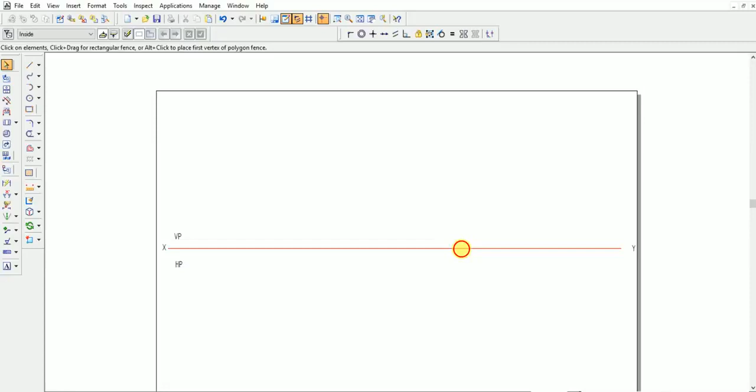Hello everyone, in this video I would be showing you how to draw a pentagonal lamina which has got sides of length 25 mm and rests on its corner on HP such that the surface makes an angle of 30 degrees with HP and the perpendicular bisector of the edge passing through the corner on which the lamina rests appears to be inclined at 30 degrees to VP. Then draw the top view and front view of the lamina.

Yes, let us start by drawing the pentagonal lamina. If you are unaware of the way to define the lines, say visible line or XY line or anything as such, you can visit the first video of this particular playlist which has got the information regarding the ways to define the lines. Let us begin.

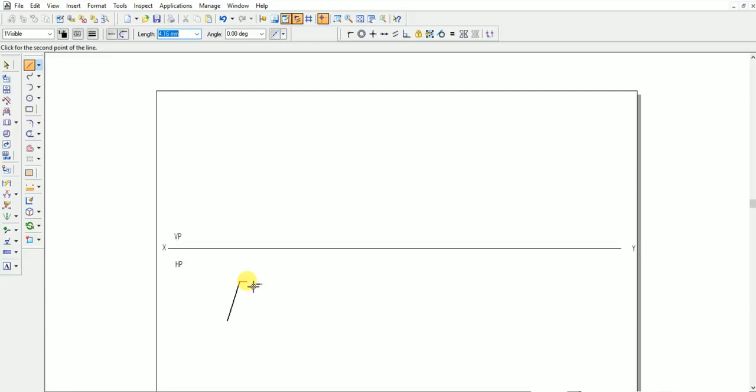25, 72. Now the angles in the case of the pentagon would be in the multiples of 72. The reason is 360 divided by the number of sides would give you each angle. So therefore the first angle is said to be 72. Next it is 25, 144, 25, 216, 25, 288, 25, 360. Yes, we have the pentagon ready.

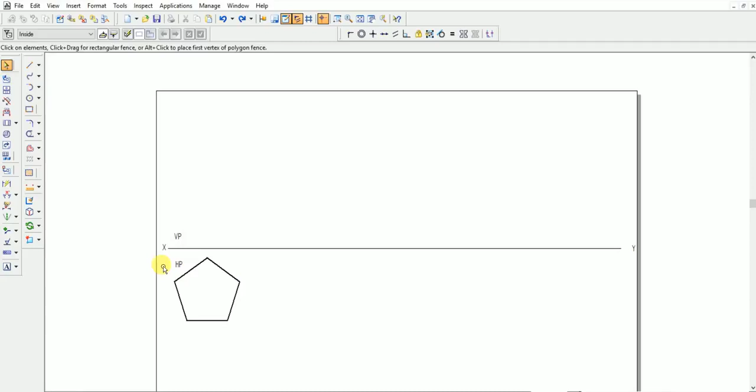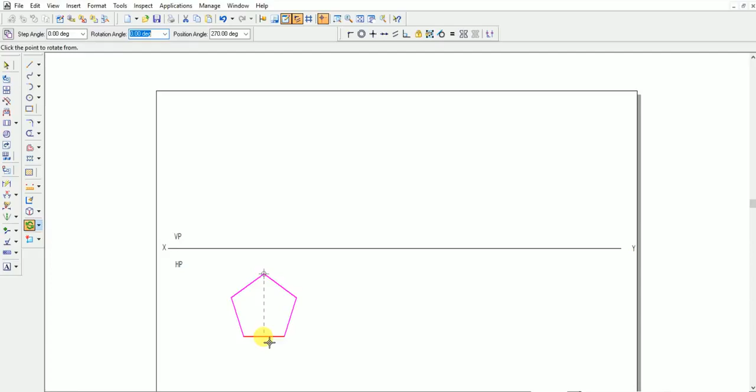Now let us move the pentagon. We need to select the entire thing. Fine. Once we have moved it, since the question says the pentagon is resting on its corner, one thing we need to observe is that from this vertex to the midpoint of the opposite side should be selected. That is very important. Otherwise, the corner position of the pentagon may not be accurate.

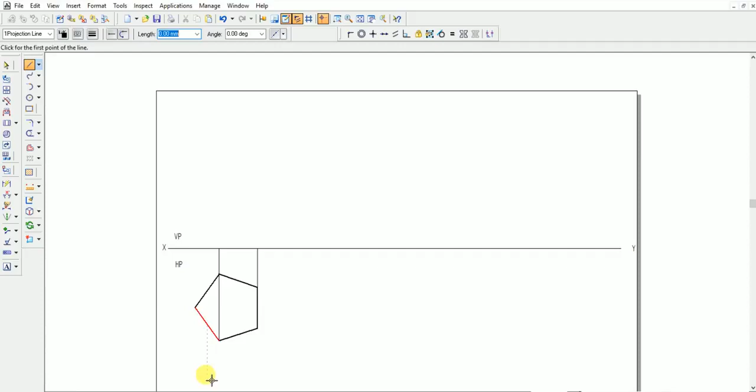Now let us draw its projection on VP. You can cross-check whether the drawn pentagon is correct or not by checking whether this particular projection line exactly joins or passes through this point or not. If it doesn't pass, then the drawn pentagon may have some errors. Okay. Now let's check the dimension. Yes, it is 25.

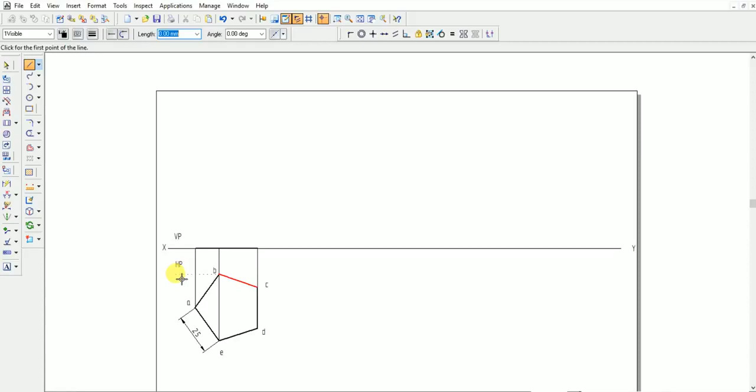Name the points first. A, B, C, D, E. Fine. Now let us draw the projection of this particular thing using the visible line here. Remember, in the case of the pentagon as well as in the case of the hexagon, in the middle of these two lines you get a point, or in the case of the corner position of the square as well, you get a point in the middle. Never forget to click on that particular point, because otherwise while you're drawing the next position, you may not be able to spot that point on the line.

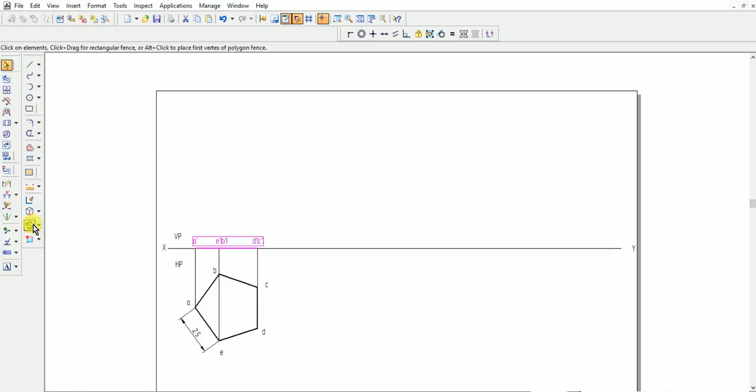Now let us move on to the next position. Click on move. Observe the copy option is active. Place it here. Yes. The next position specification is as follows. They say it is inclined at 30 degrees to HP. So I would be rotating this particular thing by an angle of 30 degrees, and just click it, check whether it is 30 degrees or not. Okay, yes, it is 30 degrees.

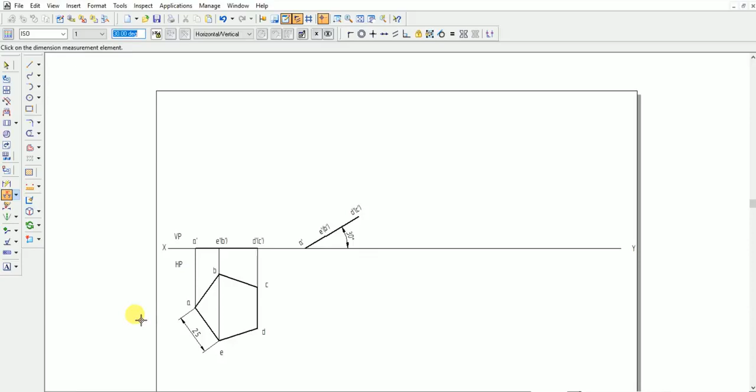Now let us draw the projection line from here. Always draw the projection lines in this position or in the other from the rightmost point, because it will avoid overlapping of the lines. Be very precise while doing this projection line work, because it can lead to errors, and that in turn can lead to error in the problem entirely.

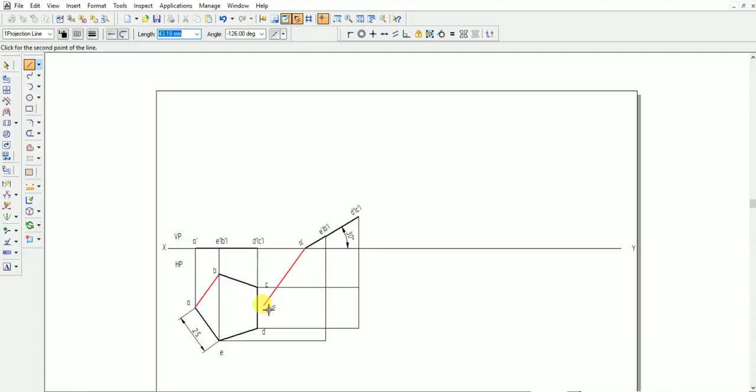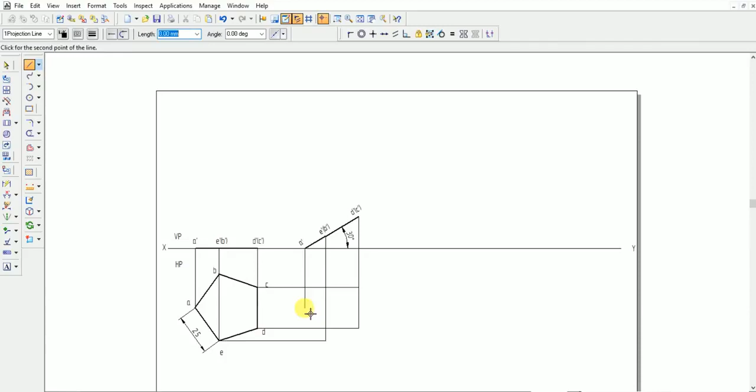Sometimes what happens is, whatever these dotted lines you are seeing, they may not be visible. In that case, here you can see something called the alignment indicator. If this is off, I will show you, this particular line doesn't come. See, no alignment indicator. So we'll just turn it on. See, now it's coming, right? Fine. Now this is the only point which is remaining to be connected. Let us draw the visible line now and use the visible line to connect these points.

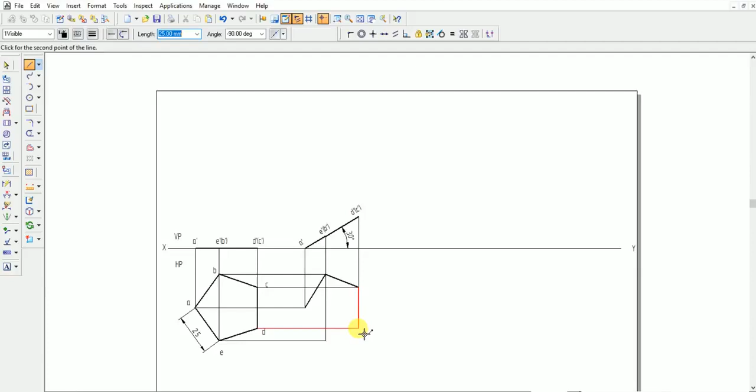Okay. A, B, C, D, E. Fine. Once we are done with it, just select it. Yes. Now here the next condition is a bit peculiar.

They say the perpendicular bisector of the edge passing through the corner on which the lamina rests appears to be inclined at 30 degrees to VP. So it is not any of the sides which is inclined. It is the perpendicular bisector of the lamina which is being rested. Okay. So therefore let us draw a perpendicular bisector.

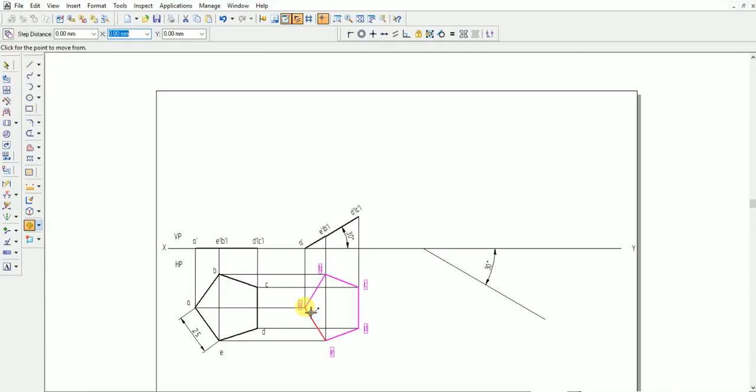Drawing a perpendicular bisector is very simple. Draw any random line. Okay. Set the given angle. They say it is 30 degrees, so I have set it to 30. Okay. Now we'll be moving. Copy option is active. Yes. So place it here. Fine. Now I just rotate it.

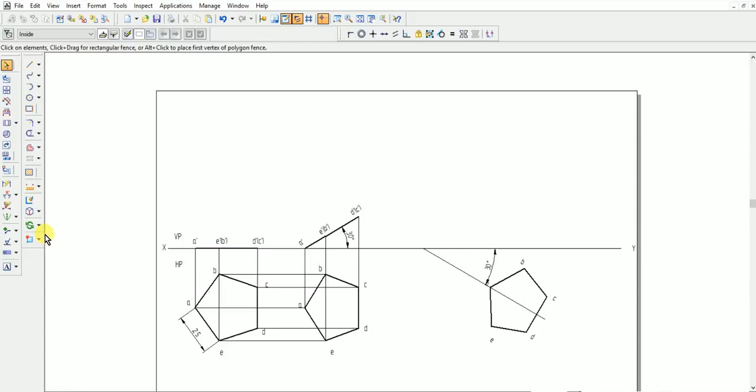Yes. So once we are done with it, this is how the perpendicular bisector condition is drawn. Okay. That is the question in which perpendicular bisector of the edge passing through the corner is defined. This is a peculiar condition. These are some of the important conditions which should be kept in mind so that the preparation would be easy, or the learning process would be easy.

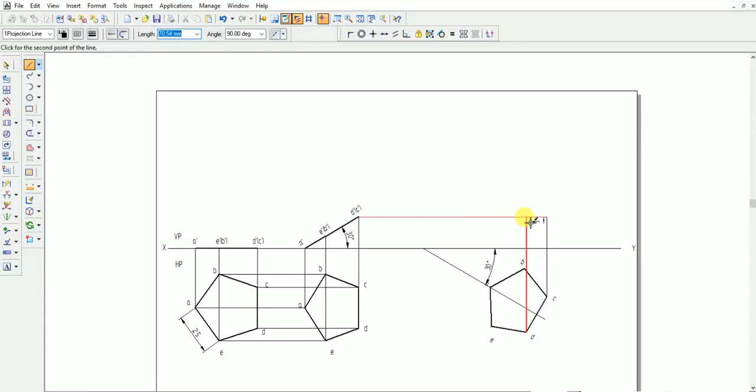Fine. Now from the rightmost point I would be starting to draw the projections. Yes. So next is this point. From the point D to D dash. Okay, next from the point B to B dash. From the point A to A dash. Ensure that there is no bend in these projection lines because they may lead to error.

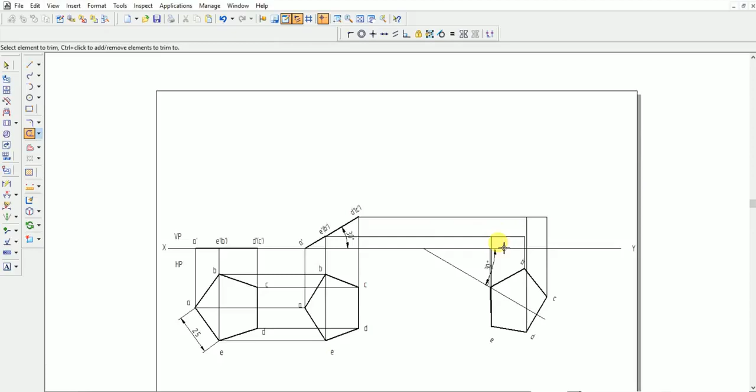If you're not sure about the lines being straight, then use the zoom option. Okay, so I will just remove the excess line here. Now I'll use the zoom option because it provides better clarity. Now I would be using the visible line.

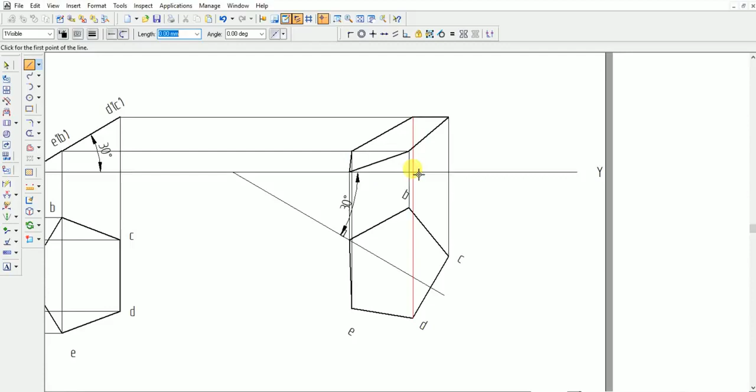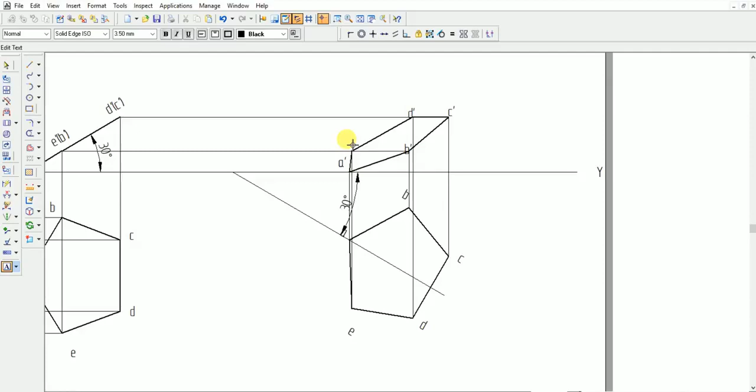Yes. So be very careful while drawing such kind of things because here both the lines are intersecting the XY line, so it may take any one. So be very careful while spotting such things. Okay, so this point would be A dash. Okay, so this point would be B dash, followed by C dash, D dash, and E dash. Okay,

fine. So this is our pentagonal lamina, which is resting on HP on its corner, and in the last position the perpendicular bisector condition would be drawn in this manner. Let us complete by drawing the leaders. We just indicate the flow of the problem. Since there are three different positions, using this it would be helpful for us to know the exact flow.

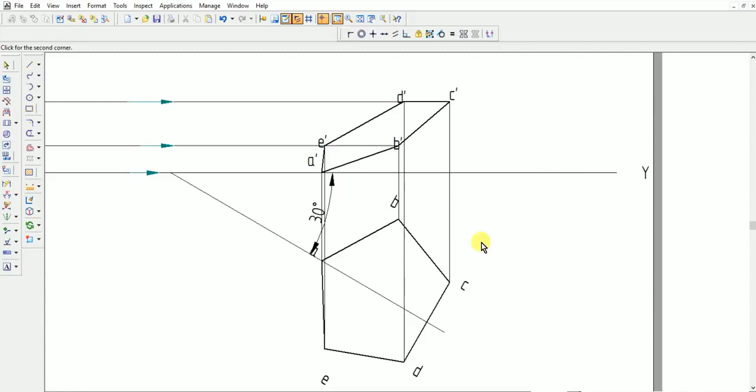Yes, again here you may require a few zooming processes. Yes. Fine.